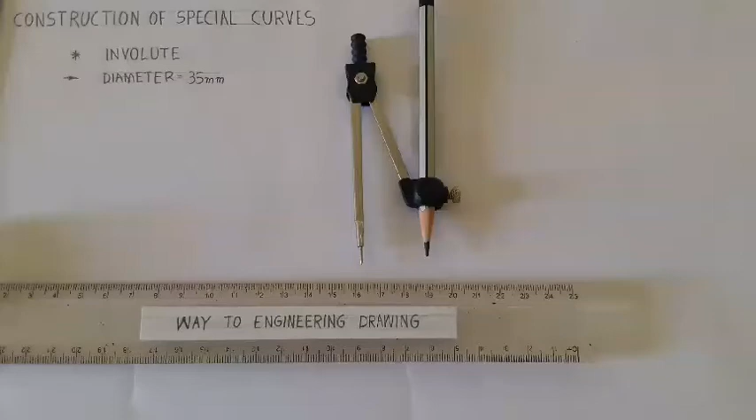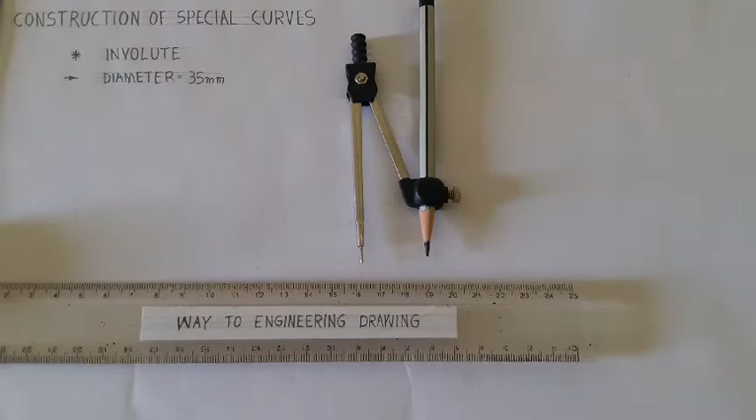இன்றைக்கி நம்ம பார்க்கக்கூடிய வீடியோ கண்டென்ட் கன்ஸ்ட்ரக்ஷன் ஆஃப் ஸ்பெஷல் கர்வ்ஸ். இதில் ஏற்கனவே சைக்ளாய்டு, எபிசைக்ளாய்டு பார்த்தோம், அதை தொடர்ந்து ஹைப்போசைக்ளாய்டும் இருக்கிறது. இப்போ நாம் இன்றைக்கி இன்வல்யூட் பார்க்கப் போகிறோம். இதை தொடர்ந்து ஆர்க்கிமிடியன் ஸ்பைரல், ஹெலிக்ஸ் போன்ற கன்ஸ்ட்ரக்ஷன் ஆஃப் ஸ்பெஷல் கர்வ்ஸும் இருக்கிறது.

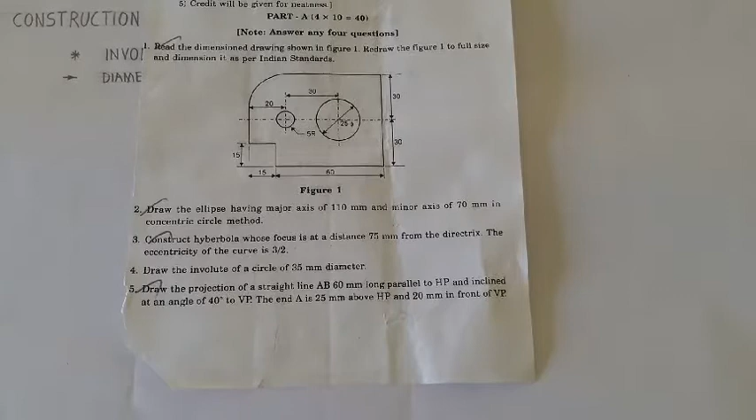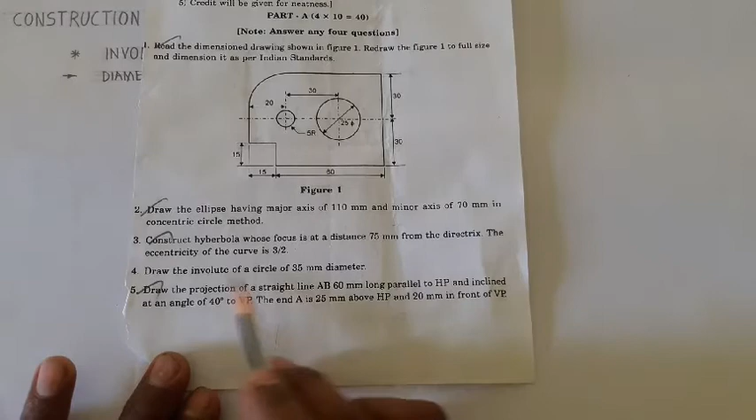இன்வல்யூட்டுக்கான கொஷின் எப்படி கேட்கப்பட்டிருக்கும் என்று பார்த்தோம்: Draw the involute of a circle of 35 mm diameter. இதுதான் இன்றைக்கி நம்ம பார்க்கக்கூடிய கொஷின். கிவன் டேட்டாவை நம்ம எழுதியாச்சு. How to draw.

Why we draw this involute? This is named as உட்சுருள் - in Tamil this involute is called உட்சுருள். இதனுடைய அப்ளிகேஷன்ஸ் என்னன்னா, கியர் டூத் ப்ரொஃபைலை வடிவமைக்க இந்த இன்வல்யூட் பயன்படுத்தப்படுகிறது. அதே சமயம் சென்ட்ரிஃபியூகல் பம்ப், மைய விலக்கு விசை பம்புகளில் இம்பலர்கள் உருவாக்க இந்த இன்வல்யூட் பயன்படுத்தப்படுகிறது.

இதை எப்படி வரையலாம் என்று பார்த்துடலாம். The given data is diameter value 35 mm. Already we know diameter 35 mm means we take the radius in our compass. 35 by 2 means 17.5 mm. We take the measurement with our compass with the use of our scale.

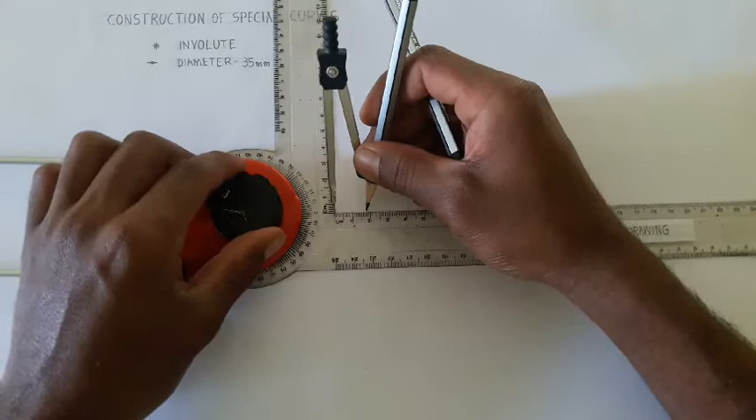Locate the center point and draw the circle of radius 17.5 mm. Directly we get the diameter as 35 mm.

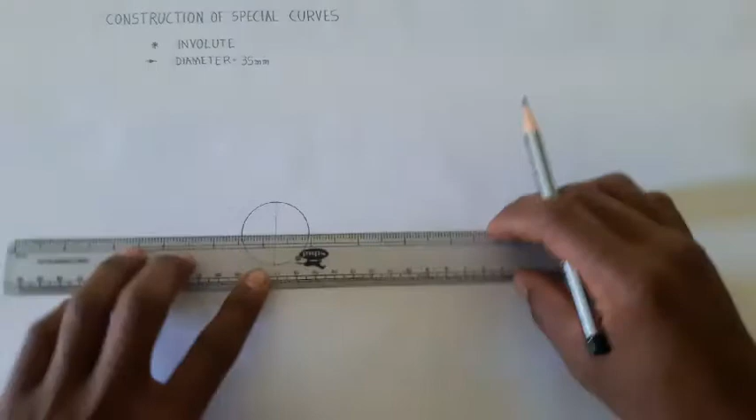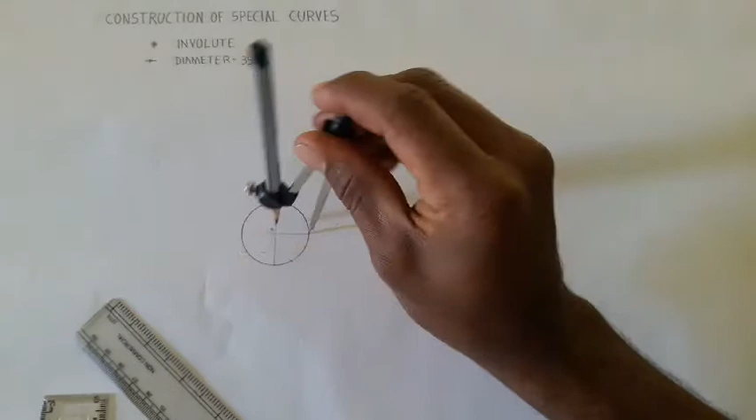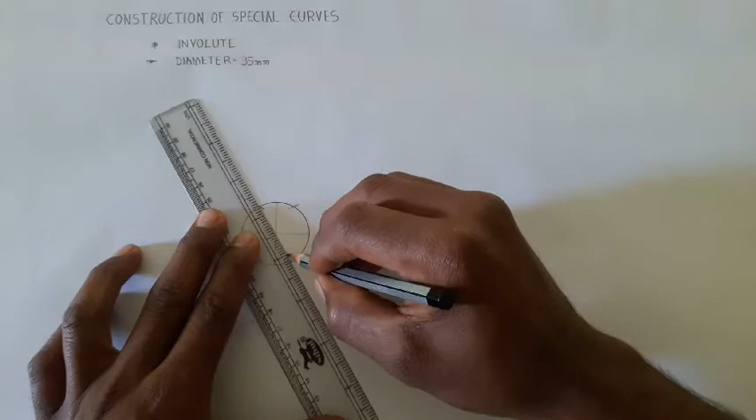Next we divide the circle into 12 equal parts. First we divide the circle into 4 equal parts. This is the center, O. First we divide the circle into 4 equal parts and take the radius 17.5 mm, locate this corner, draw an arc this side and this side. At the same time we locate this left side of the line, draw the arcs, join these arcs from this arc to this arc via the center point, join this arc from this arc via center, looking like this.

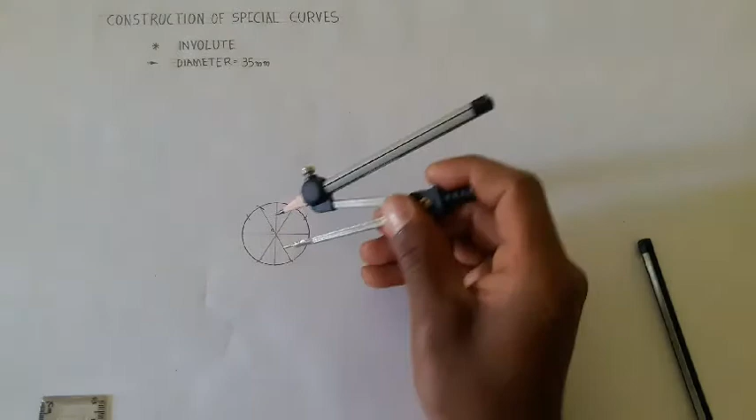Next we place the compass at the top of this line, draw the arc this side and this side, and put the compass at the bottom of the line, draw the arcs here and here, join these arcs with the center O.

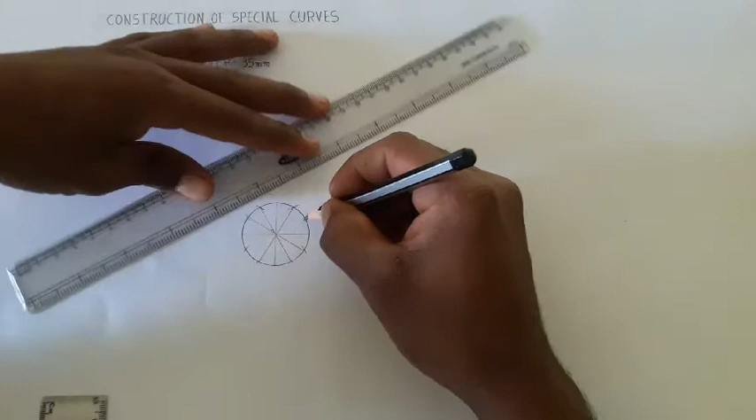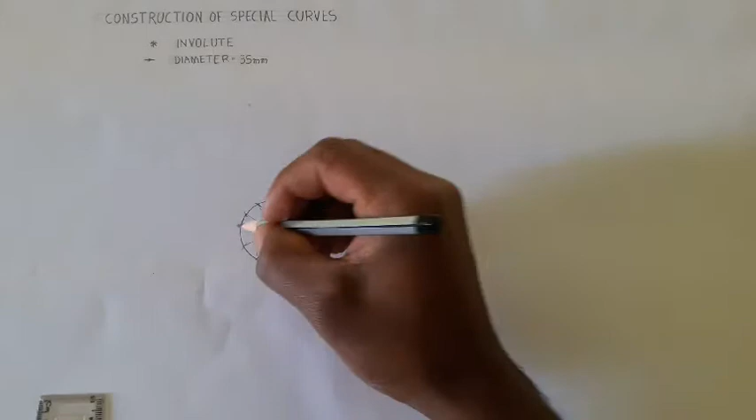Okay, we got the 12 equal parts. Put the point as this point is the 12th point. We mark the first point here. Anti-clockwise: 1, 2, 3, 4, 5, 6, 7, 8, 9, 10, 11, 12.

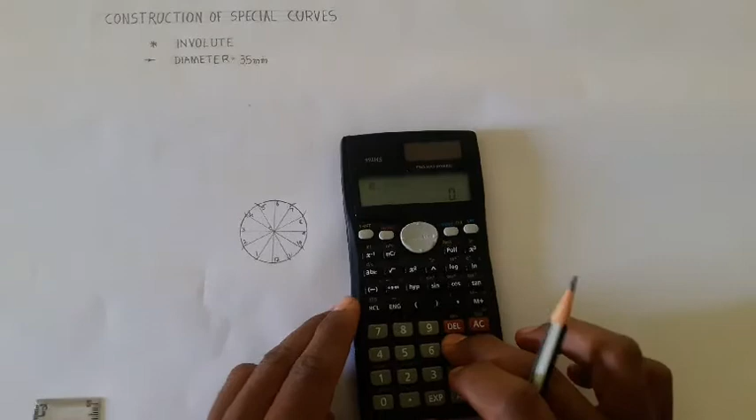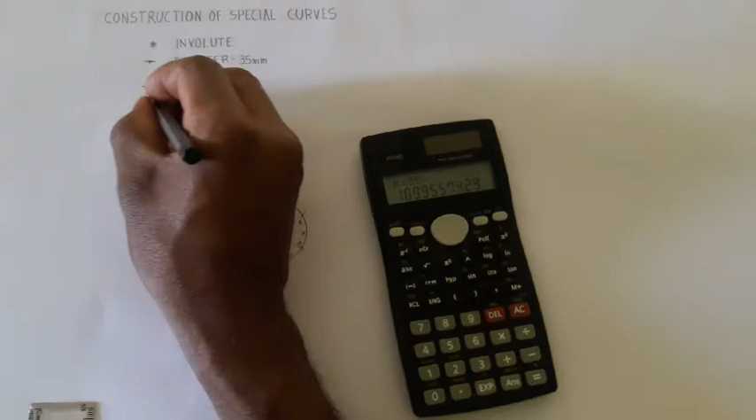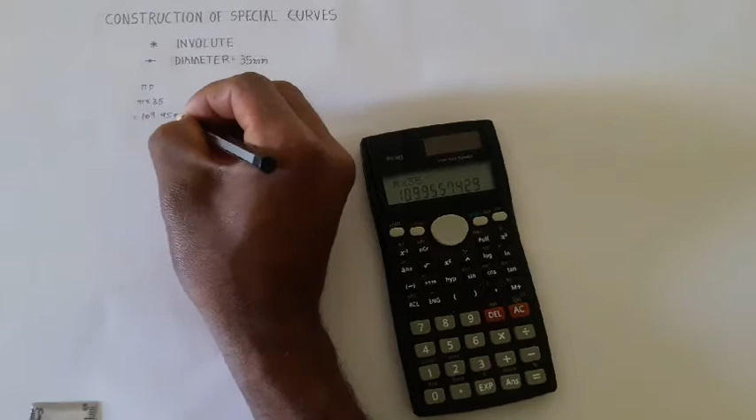Next we find the formula, using pi d. Pi into the diameter value 35 mm, we got 109.955 mm. Pi d formula, pi into diameter value 35 mm, we got 109.955 mm. Draw a line.

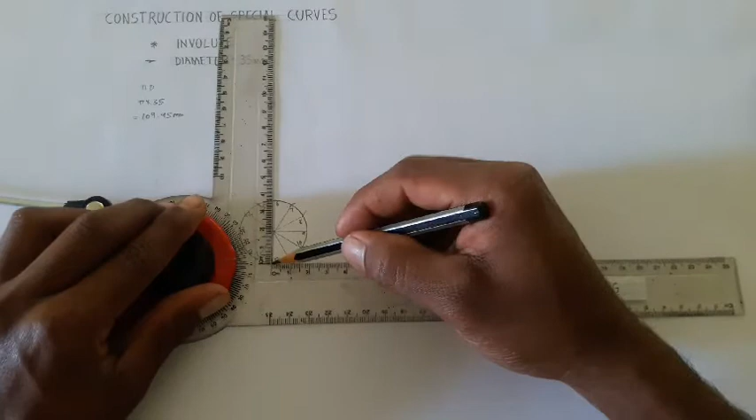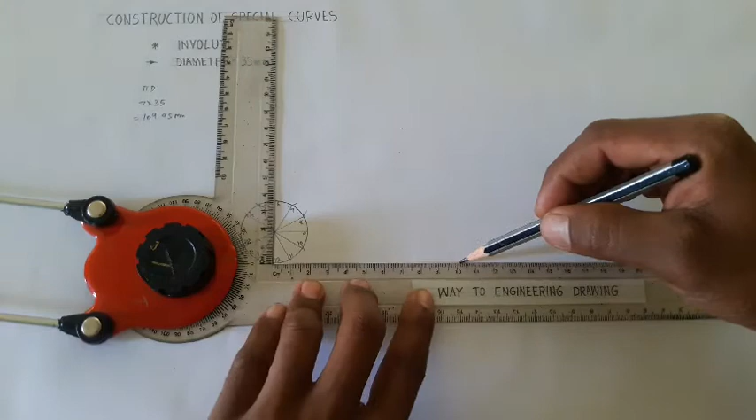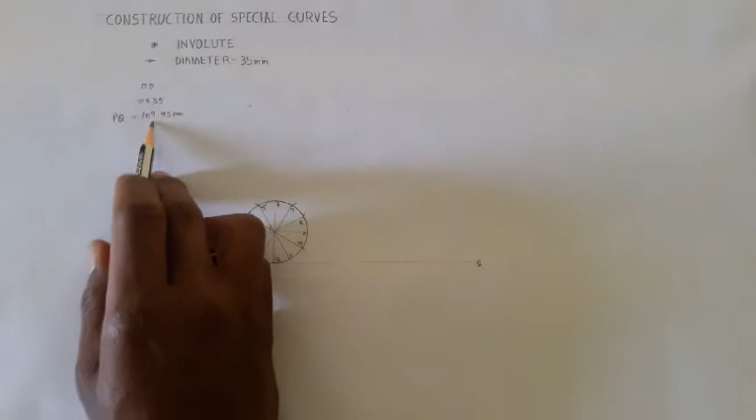109.955 mm from this point. Draw the line, pi d, this to 109. This is 100 mm, 105, 109. Put the point as this point as P, this point as Q. Because PQ equal to pi d, pi into 35 equals 109.95 mm, this point to this point PQ having 109.95 mm.

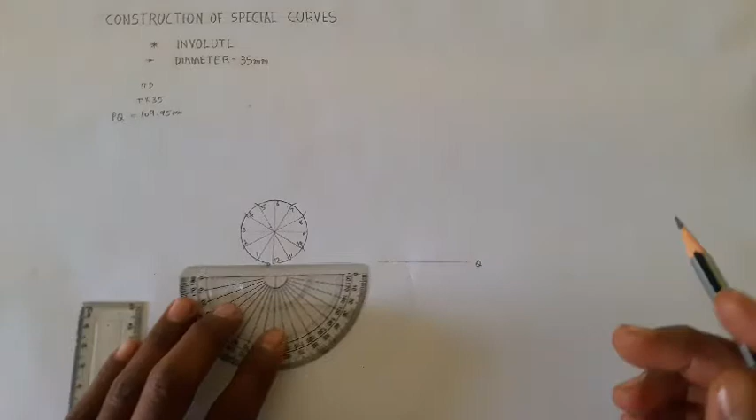Next we divide this also into 12 equal parts. Already we know the proper method to divide the line into equal number of parts: locate your protractor at this point, mark 30° on our protractor, and draw the line.

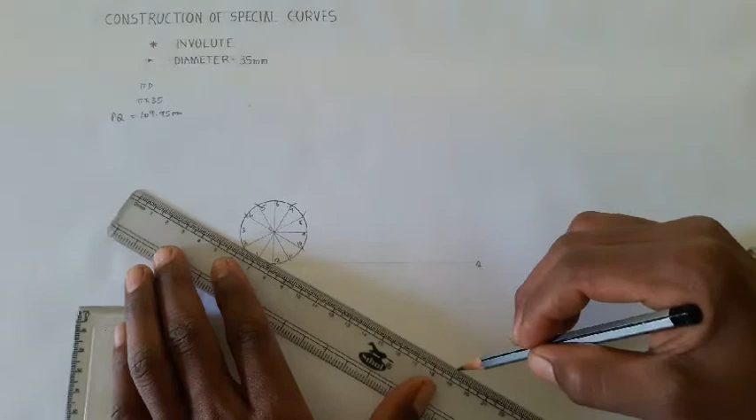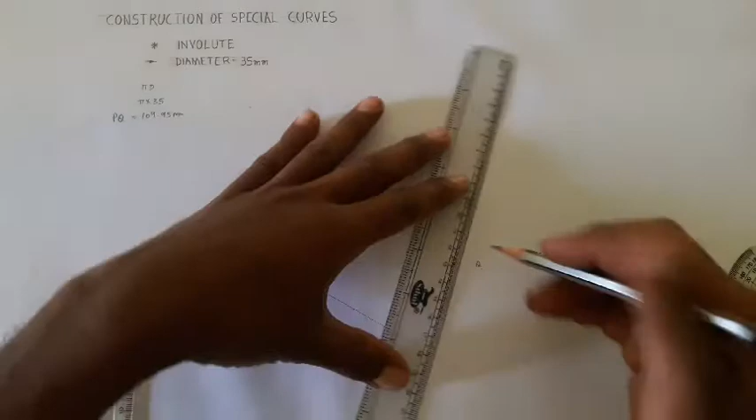From P with 30° inclination line. This line measurement is same, 109.95 mm, from this point at 30° inclination. We mark 109 mm, same as this is the 109 mm. Mark this point as Q dash and join the Q and Q dash points.

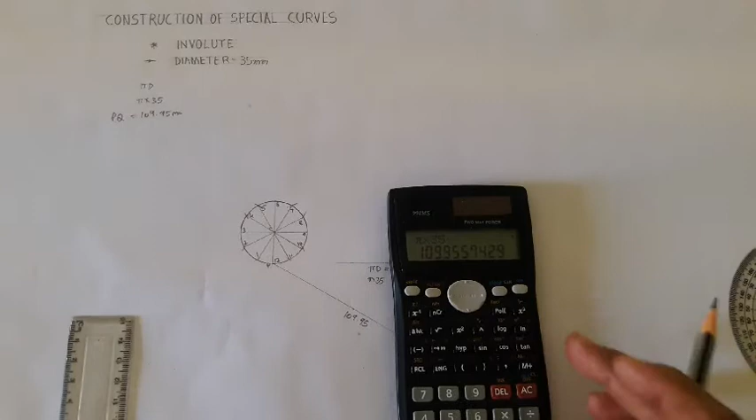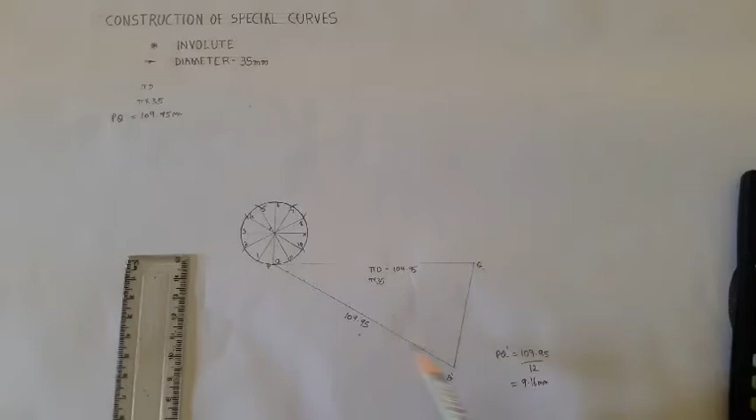Next we divide this P and Q dash into 12 equal parts. Already we got 109.9 mm, dividing by 12 we got 9.16 mm. PQ dash equal to 109.95 mm into 12 equal parts, we got 9.16 mm.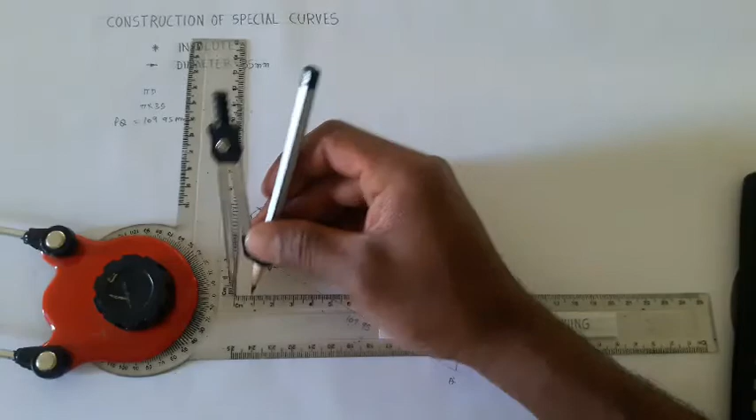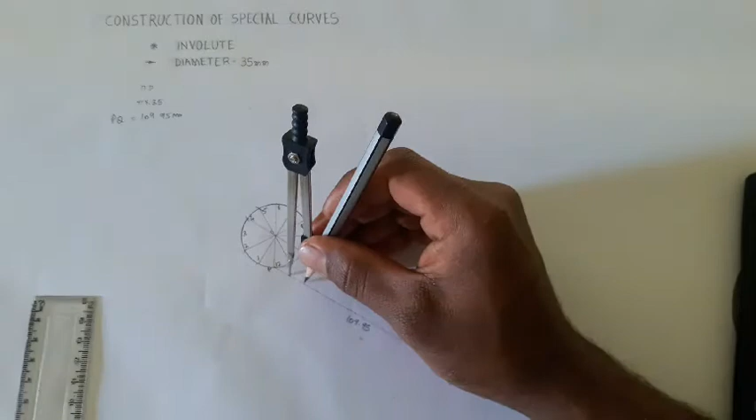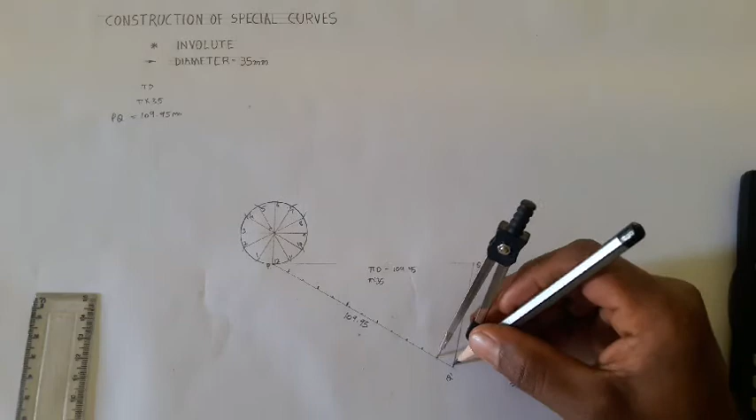Take in our compass the measurement as 9.16 mm. Now we divide the PQ dash into 12 equal parts from here: 1 equal part, 2 equal part, 3 equal part, 4 equal part, 5 equal part, 6 equal part, 7 equal part, 8 equal part, 9 equal part, 10 equal part, 11 equal part, 12 equal parts.

Name the points as 1 dash, 2 dash, 3 dash, 4 dash, 5 dash, 6 dash, 7 dash, 8 dash to 12 dash. Set the scale on this inclination line and draw the lines.

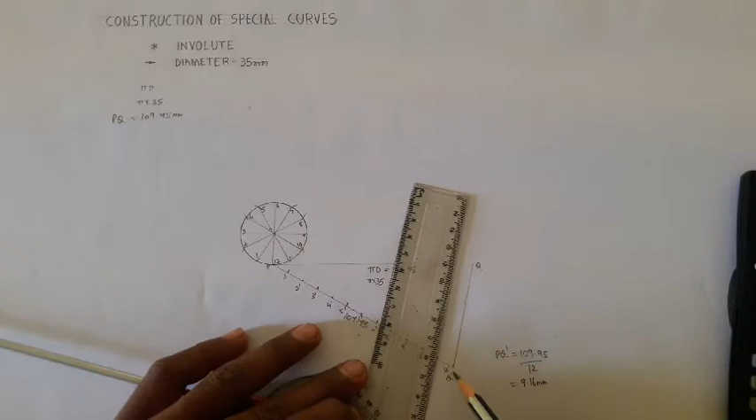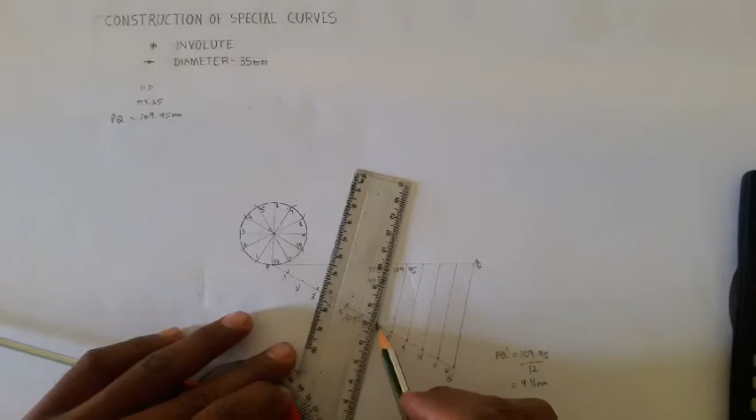Already we draw 12 dash to the 12th point. 11 dash to the 11th point, 10 dash to the 10th point, 9 dash to the 9th point, 8 dash to the 8th point, 7 dash to the 7th point, 6 dash to the 6th point, 5 dash to the 5th point, 4 dash to the 4th point, 3 dash to the 3rd point, 2 dash to the 2nd point, and 1 dash to the 1st point.

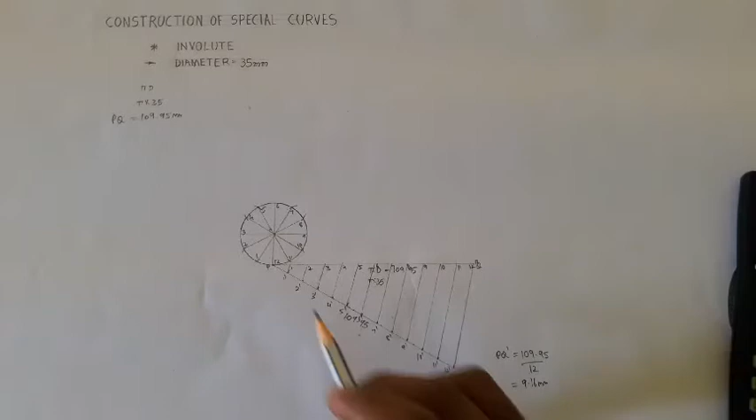Okay, put the points as 1 dash means 1 point, 2 dash means 2 points, up to 12 dash means 12 points. Next we draw the perpendicular lines. This is the first line. Okay, we take our scale.

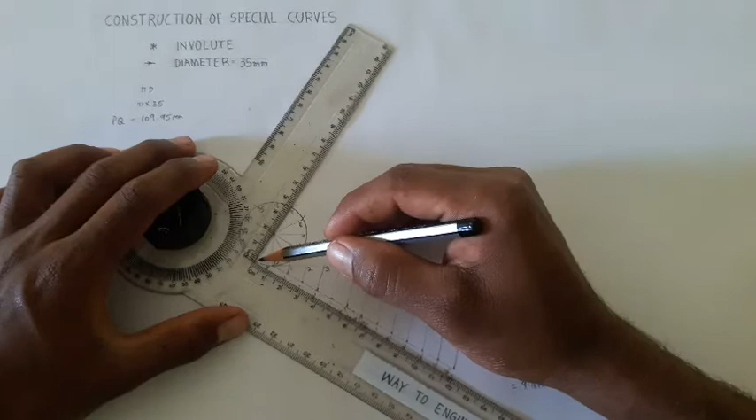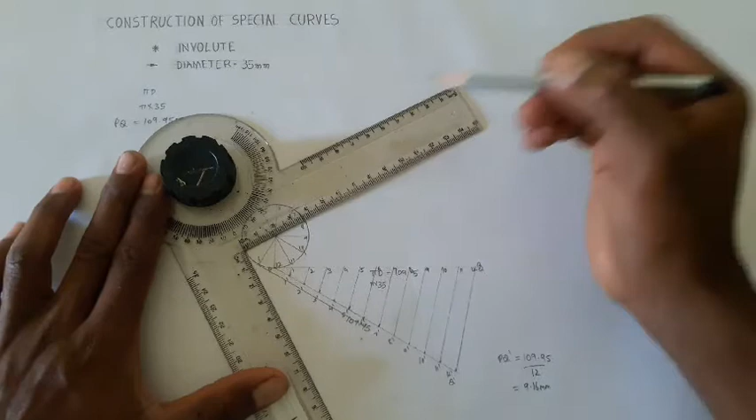This is the first point. This scale goes parallel to this line. This is the perpendicular line. This is the first line, and at the same time this is the second line. We place the scale parallel to the second line, and automatically we get the perpendicular line.

Next we place the third point. This is the third point. We place the scale parallel and get the perpendicular line. Same for the fourth line.

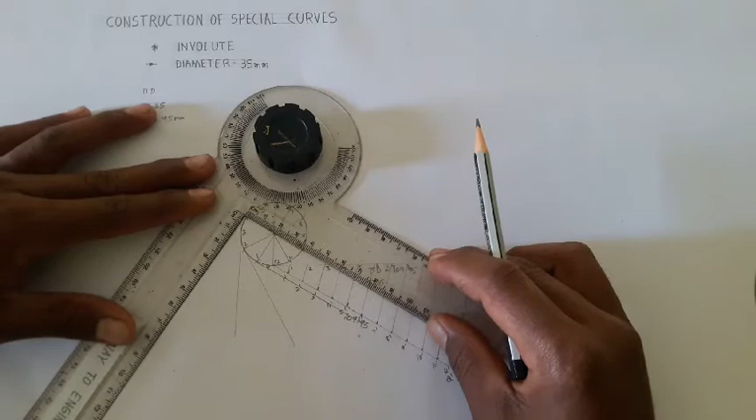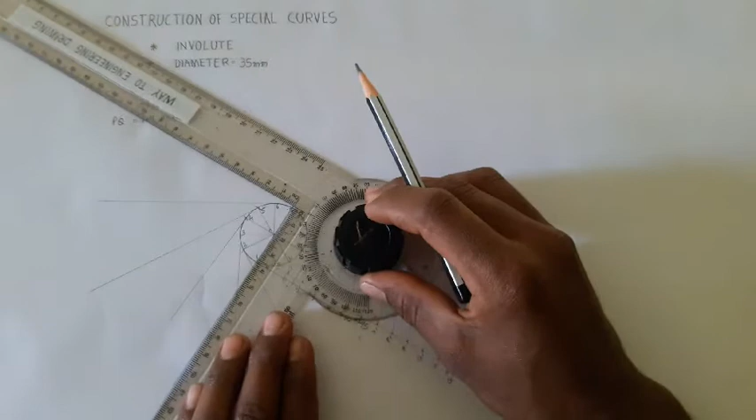Fifth line, sixth line, looking this side, seventh line, eighth line, ninth line.

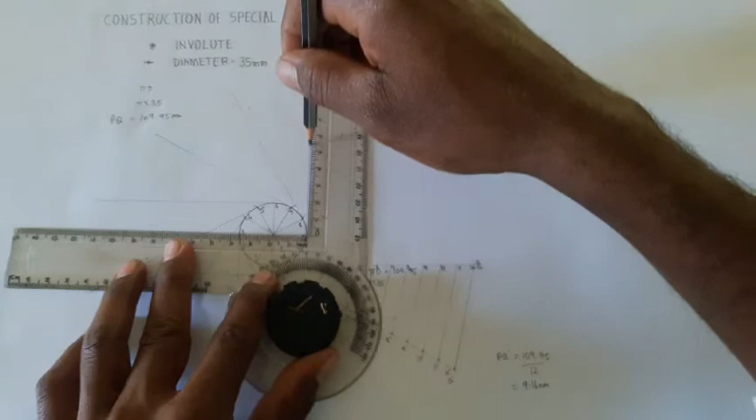3 and 9 are the same. For the 3rd point, the direction is from up to below. For the 9th point, it's from below to the upper side.

Okay, this is the 10th point. This is the 11th point. Okay, make this parallel and we get the perpendicular line.

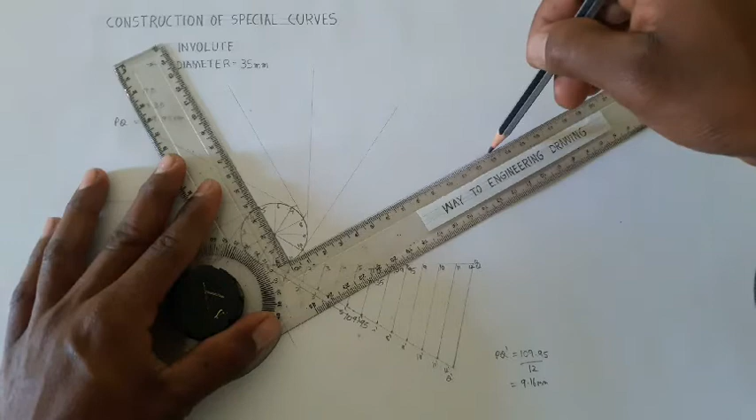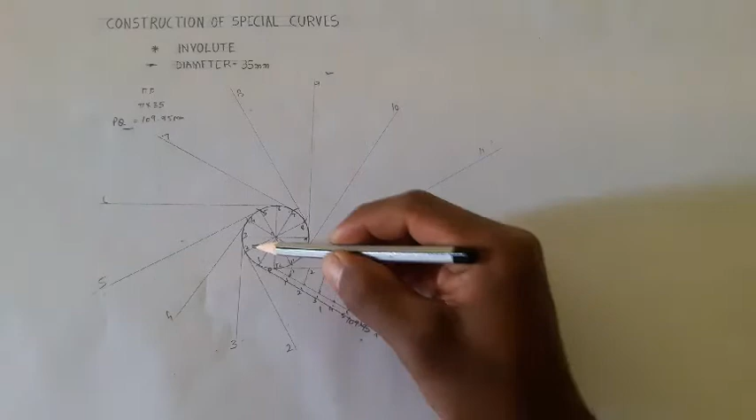It looks like this. Okay, name the points: this is 1, meaning line 1; this is 2, meaning line 2; this is 3, meaning line 3; up to 12, meaning line 12. Okay, this is temporary.

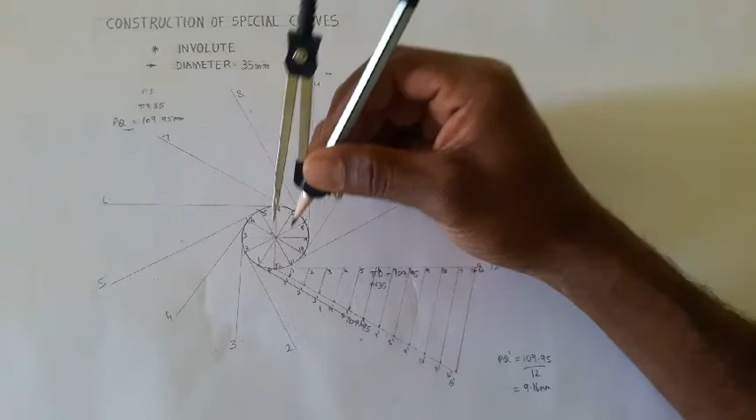Next we take the measurement from point P to the first point. P to first point, goes to this one point. Draw the arc on the first line.

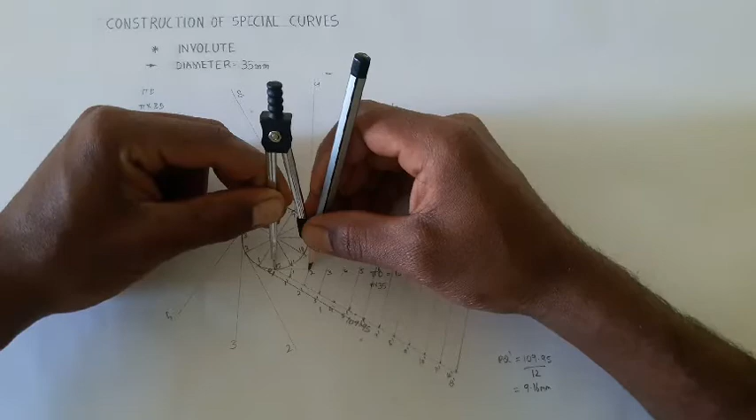Next we take the measurement from point P, extend to the second point. We go to the second line and draw the arc on the second line.

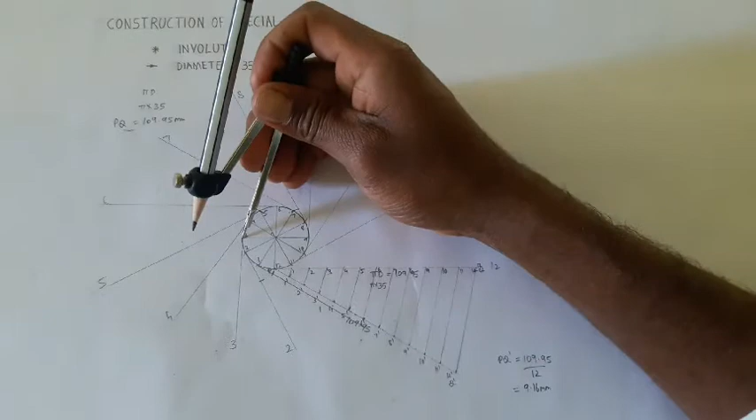Same as before, from point P extend to 3, P to 3. This follows the third line. This is the third line. We draw the arc on the third point.

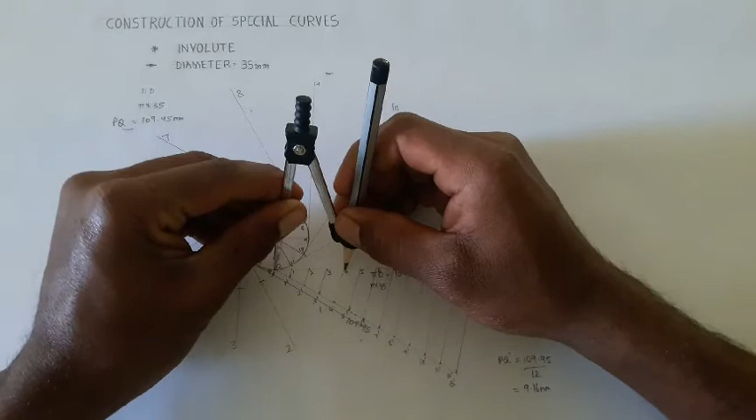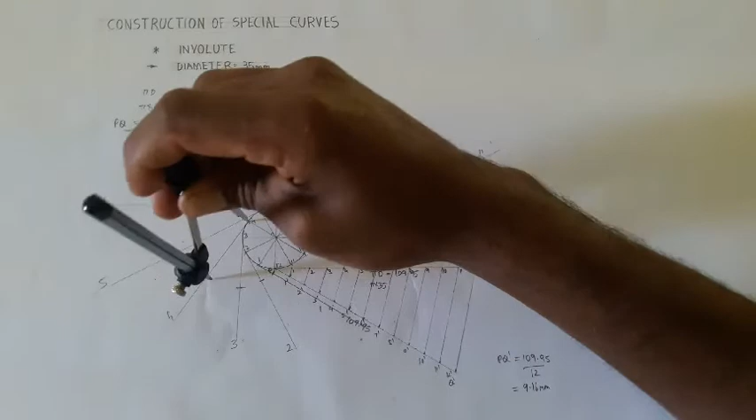Next, from point P to 4, take the measurement P to 4 point. Locate the fourth point - this is the fourth point. Draw the arc at the fourth point on the line.

Next we locate the point P to 5. Go to the fifth point - this is the fifth point line. Draw the arc. From point P to the sixth point, P to 6, go to the sixth point on our circle end. Draw the arc.

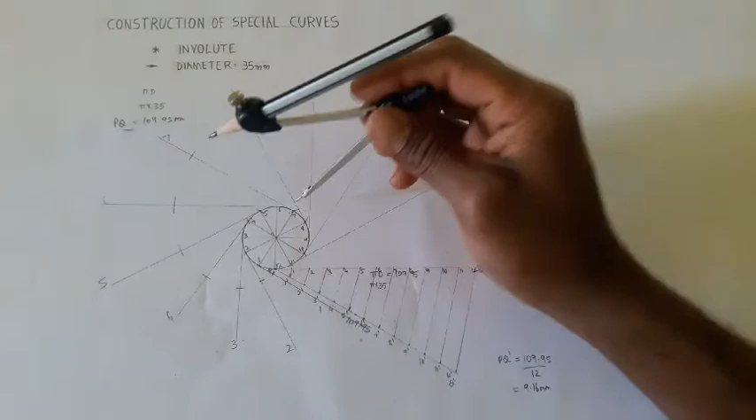From point P to 7 dash, go to the 7th point - this is the point. Okay, from point P to 8 point - this is the 8th point. Go to the 8th line - this is the 8th point.

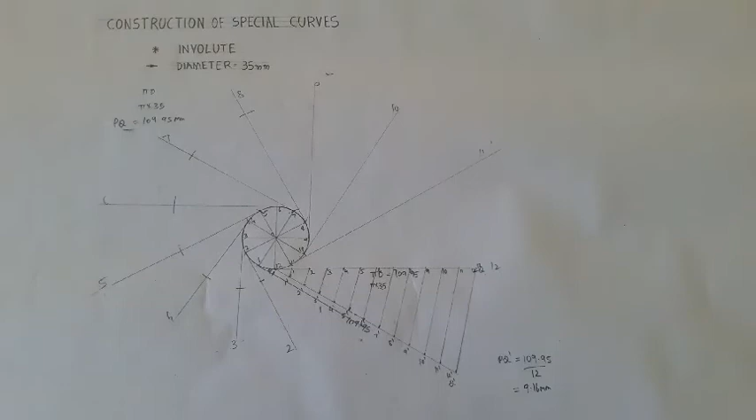From point P to 9, we measure, extend P to 9. This is the 9th point. Draw the arc.

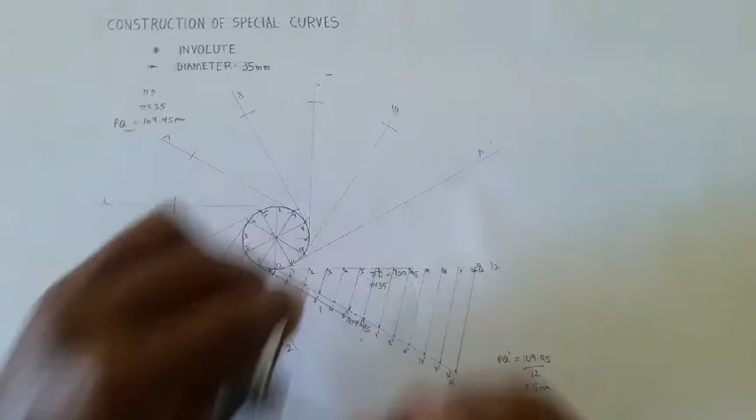Next, from the point P to 10 - this is the 10th line. Draw the arc. Okay, from point P to 11 we extend, P to 11, go to the 11th point. Draw the arc.

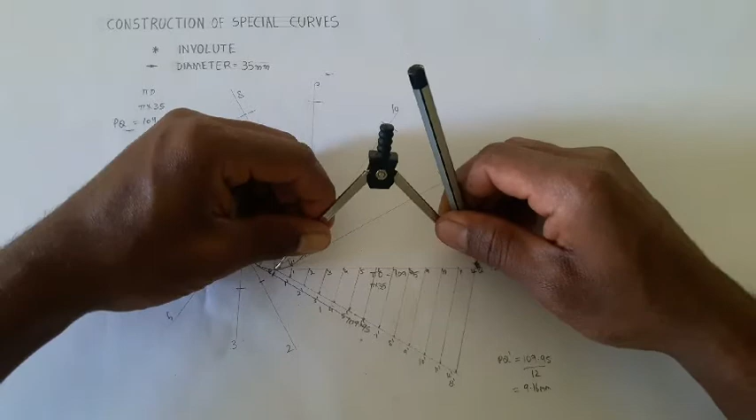Next we measure from the point P to 12. This is also from the point to 12. Draw the arc. Okay, erase the unwanted lines.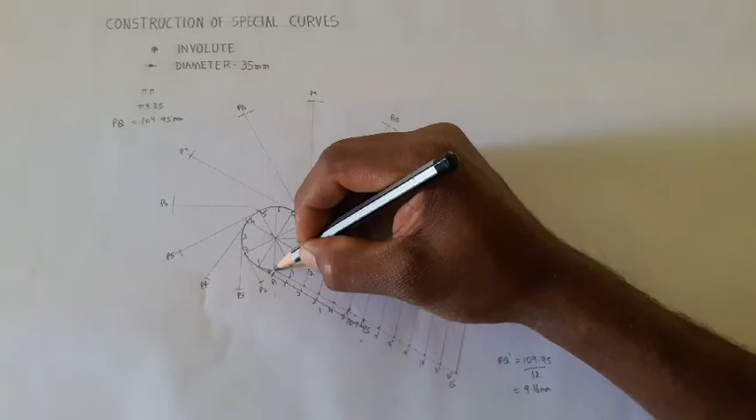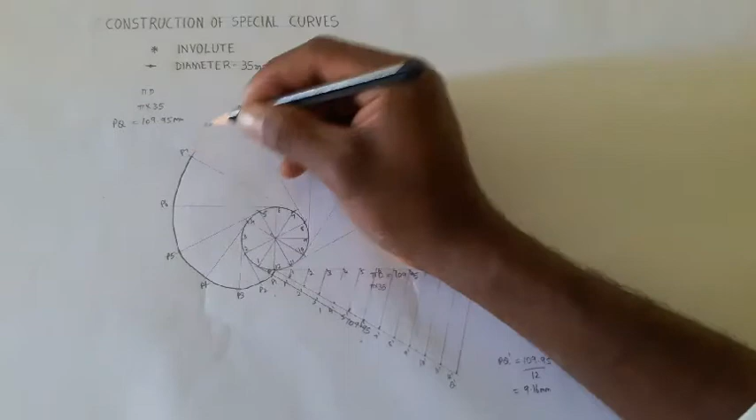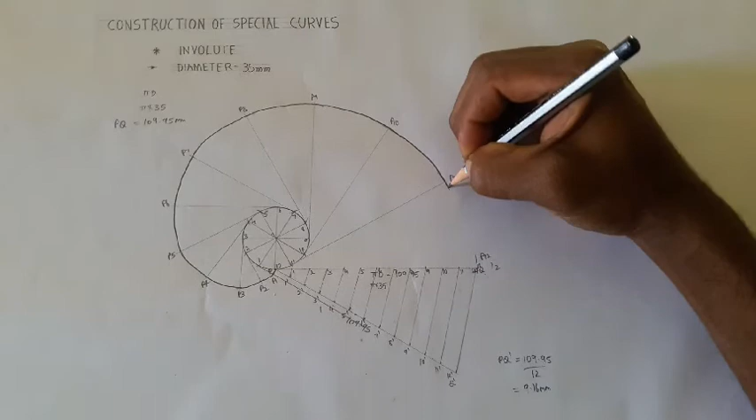Now we trace the involute curve from point P: P2, P1, P1 to P2, P3, P4, P5, P6, P7, P8, P9, P10 to P11, and the end at P12 or Q point.

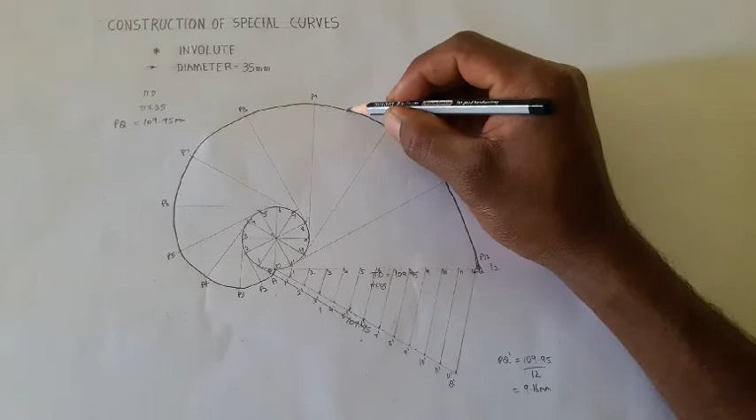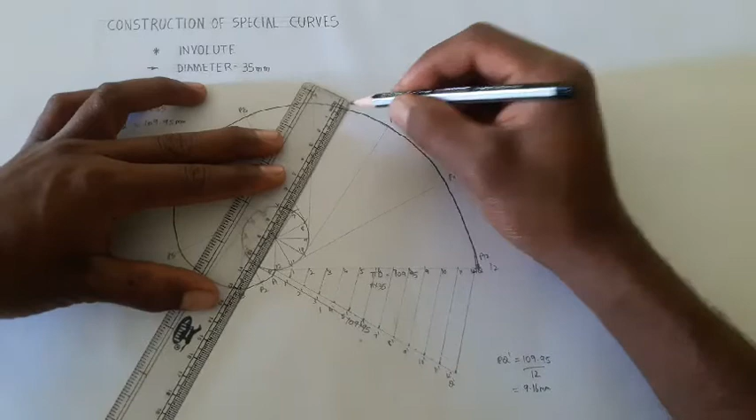Next we draw the tangent and normal at any point on this involute curve. Mark any other point on the involute curve - I mark here. This point, okay, draw the line from this point to the center point of the circle. Measure this line - the measurement is 86 mm on our scale.

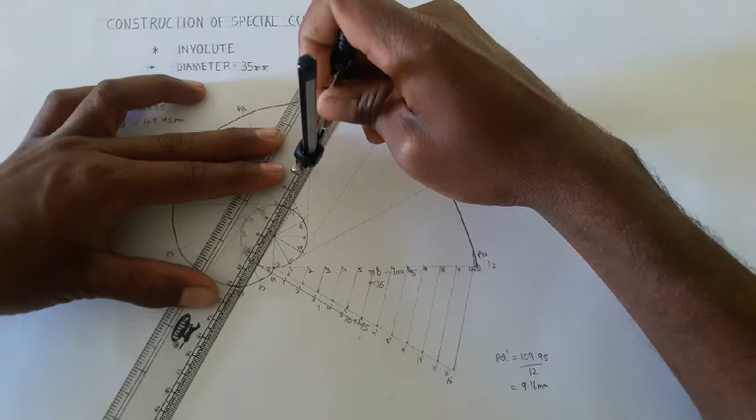86 by 2 means 43. Take 43 mm in our compass. This is 43, this is the center of this line. Draw a semicircle from this point to the center of the circle point.

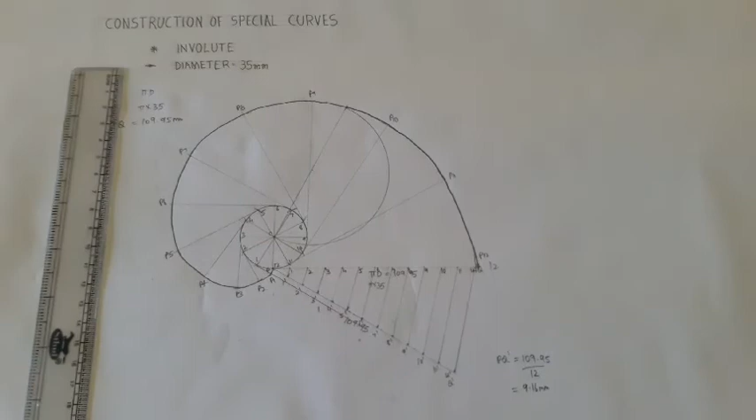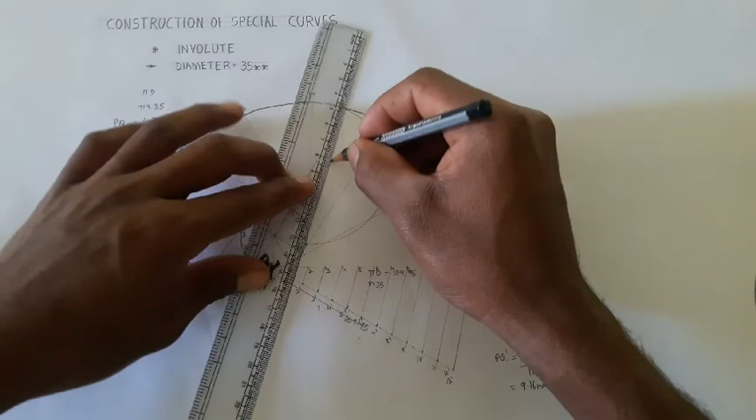Where they meet the semicircle - the semicircle meets the circle here. This point intersects the semicircle and the circle. Take this point and draw the line. This is the normal line, N1 and N2.

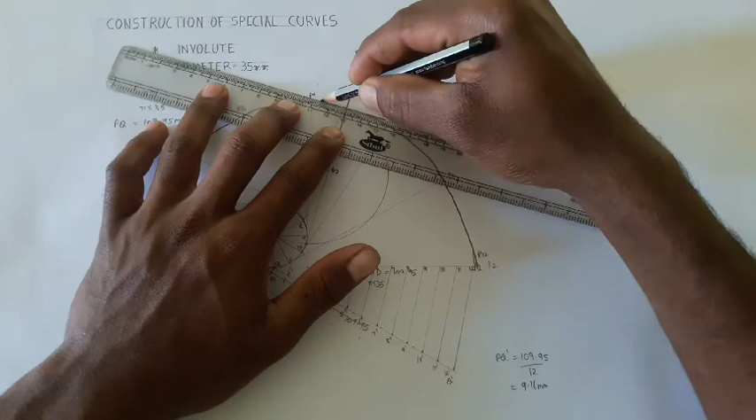Draw the line from the normal line to the perpendicular line. This is the tangent line, T1 and T2.

Okay, this is the involute curve, this is the tangent line, this is the normal line. This is the involute.